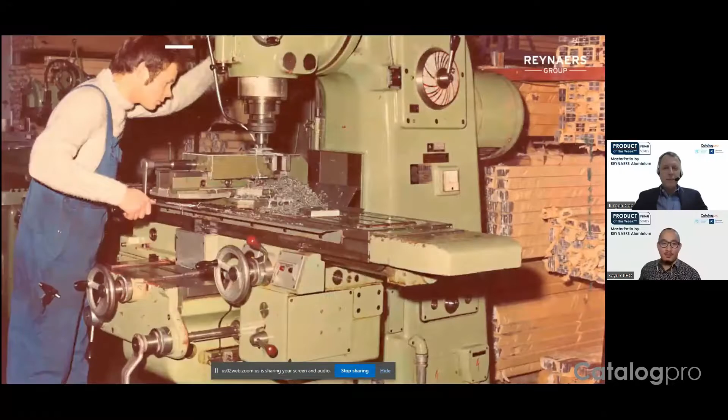Yeah, so hello Ledy, hello Sandhy. Yeah, so it's I heard it was a dialogue and not a monologue. So please, okay, I'll start with introducing the company.

It's a family business. It started in 1965 with Mr. Jan Reynaers, who was a fabricator. He started to make his own windows and doors and designing his own systems. Then his friends said, look, I don't know how to extrude a profile, I don't know how to design, but I'm interested in making windows and doors. So at that time, Mr. Jan Reynaers started to sell the systems to some of his friends and other people. This is how we became a system company and not a fabricator.

A little bit about our values. We are entrepreneurs, we are innovative, so the word innovation will come back more times in the presentation. We act responsible as a large company. You have to take care of the environment and future generations. We will talk about it more during the presentation again. We give the best of ourselves, we are passionate about what we are doing, and we behave and act as a family. We are united together with all our partners.

A small message about partners. So also present in this talk show is Sugiarto from PT Aneka, which is our local partner in Indonesia. Later in the presentation it will be more clear how that relationship works, what is Reynaers and what is the local partner, in this case, PT Aneka.

Our mission, so Reynaers already have a representation in Indonesia, right? Yes, correct. Yes, he's here. The name is PT Aneka. Oh, okay, PT Aneka. Yeah. So for the architects from Indonesia, if they want to spec in the Reynaers, they can just call PT Aneka, right? Yeah, easy, also anytime.

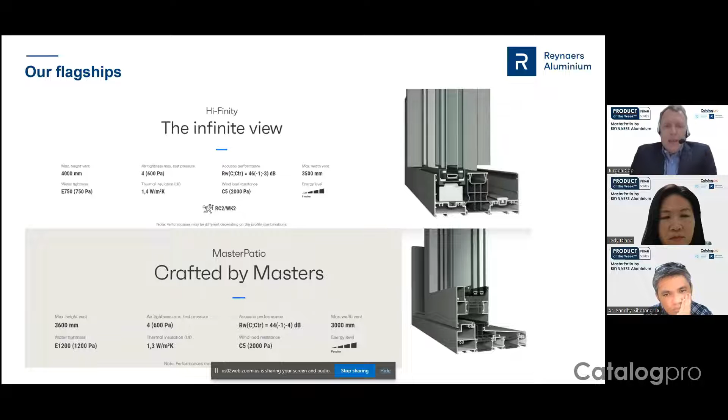Yeah, so our flagships, the first one is Hi-Finity. The Hi-Finity was a huge success, people loved it. There was also a little bit of a downside, it was a little bit expensive compared to a normal product. And then we made something else, something competitive, which is the MasterPatio. So Hi-Finity, you see it on the screen here, the infinite view. I'm going to start with Hi-Finity. So this is the type of projects that you can do. You can also repeat this on different floors in high-rise projects. So it's not just a sliding system, it's a facade system with a sliding window inside and with minimalistic look, minimalistic sidelines. You can also call it razor edge picture frame, however you want to call it. So this is what you can do with Hi-Finity.

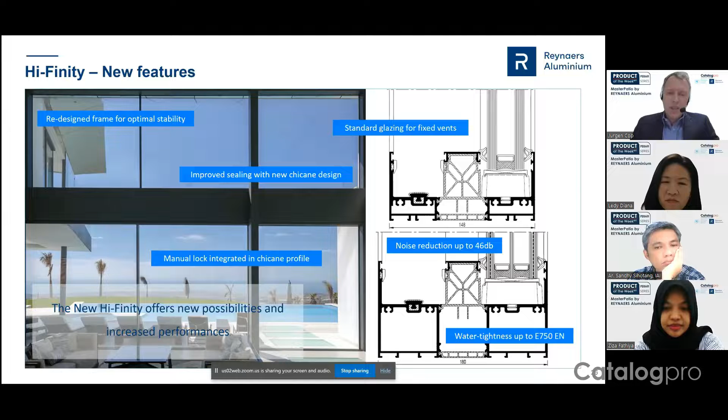That's the minimalistic look. But how do you lock your door? We did that at the top of the door with a pin that drops down, using electricity. But we had so many questions asking for a manual lock that we now made one, located on the chicane profile here in the middle. Noise reduction up to 46 decibels.

Water tightness - this is a normal sliding door, the Hi-Finity, not a lift and slide, up to 750 Pascal for water performance. When you see in my presentation, or later on the website or in any product documentation of Reynaers, a water tightness or wind performance figure, you have to imagine this is the standard tested value.

Why don't we put the maximum there? Because if it's, for example, 1,500 Pascal, which we also did before with certain products, that means we probably did something special to the window or door, maybe related to a certain project or certain circumstances. But the 750 Pascal you officially see in the documentation will always work if you use the section related to it.

It doesn't mean we cannot do higher - it means this is what will always work. Otherwise, people will take that section and say, hey, you said it was 1,500 Pascal, I'm using it now, why is it not passing 1,500 Pascal?

Second of all, if we designed every window and door to handle 1,500 Pascal or whatever, it would need such a strong design and so many components that it would make the price too expensive for 80% of your projects, because not every project needs these extreme wind and water performances. So please don't only stick to what you see in official documentation - contact us if you have a different request.

We have a question because it's quite interesting to see a very slim and big sliding door, but for the handle part, the frame is kind of thicker than the other part. How does the locking system work? There's no normal sliding door where you just turn it to lock it.

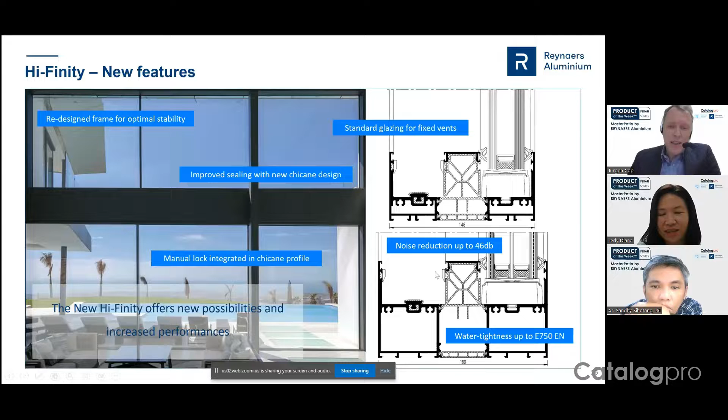Don't forget that this is a normal sliding system, not a lift and sliding system. So all you have is brushes here, and still you get this kind of performance. So this is normal sliding, yes. You're relying on the water to go into the grooves of this floor to be drained out.

I think the architect will be very happy with this detail. Later there's going to be another slide showing this more clearly. Okay, I'm going to go to the next one.

Another thing: now we have the bottom clean and the top clean, and we don't want to see the vent anymore when we open the door. So we call it a pocket solution — basically the whole door disappears inside the wall. You need to make sure, like in our project in Jakarta, that you foresee at the left side another wall where you can hide your vent. So during construction you have to make sure that wall is there. But these are details we can share once we go for that solution.

Corners: we have internal corners and we have internal and external corners. A lot of people like to open their window like this, and this is possible with Hi-Finity. To reduce the total cost of the system, if your Hi-Finity or your glass is continuing, it can connect on the right side into a continuous fixed glazing profile, which looks like a stick curtain wall system, so the glass can just continue and the look will be the same. The capping on the front is 50mm, same as the chicane of the Hi-Finity door.

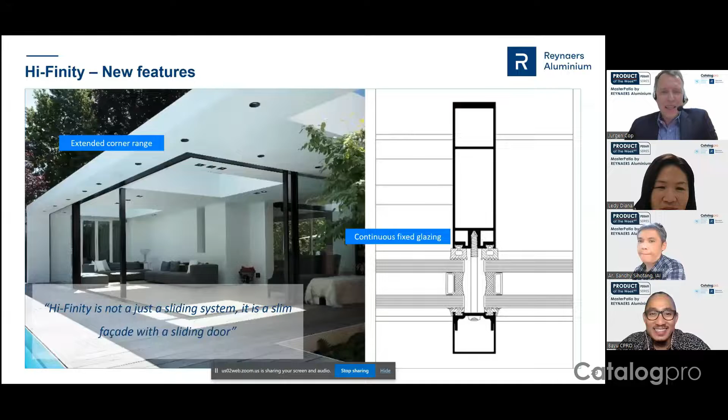Can we integrate this with your other products, Jurgen? Because many architects actually request this. Not yet — Hi-Finity is the highest level of the products we have, that's why we started with Hi-Finity. What we have in the other products at the moment is that we retrofit, or we make a frame and a vent on top of the sliding door.

So you can do it on the outside or on the inside. In Europe, we do it on the outside. In Thailand here, a lot of people like their mosquito screens on the inside. So we have a whole door, which is a very small profile, a rail and a vent, which we put on the outside of the frame.

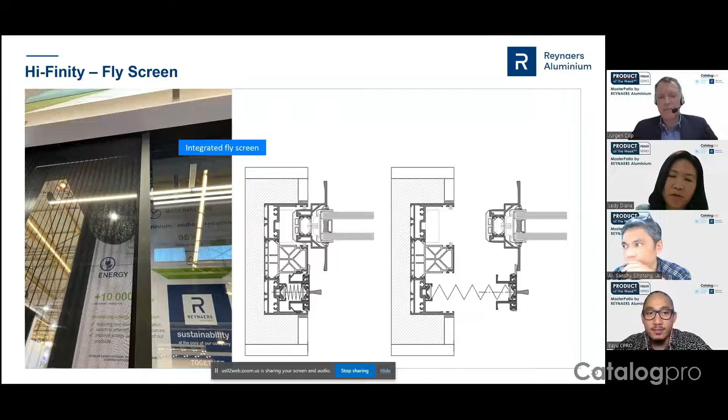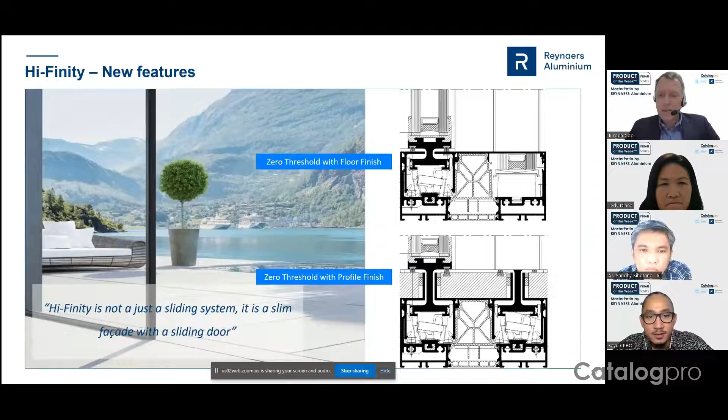I don't know if I have a section of the rail now. Here at the top, yeah, here the rail is. Do you see my mouse moving? Okay, so this is the rail. You can see this is not a small rail like you see in the MasterPatio - this is the normal rail that you know in a sliding door, right? In Hi-Finity, it is like this.

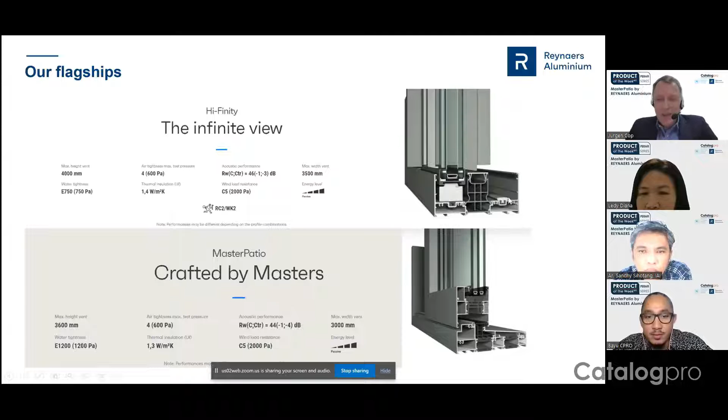So, if you look at the wheels, they are not straight - they are a little bit bent to the inside. This is to prevent it from coming off the track, and it gives extra strength and extra smoothness when you roll the door. So we did a lot of tests on the shape of the track and the wheels, to find what would be the best way to slide it smoothly.

For example, we make these bearings in stainless steel. Why stainless steel? Because it has very high durability - we do tests on durability - and it has a very smooth movement. What do some of the cheaper competitors do? They make it in the standard material available from suppliers, which is copper. When the rollers are made from copper, they are 25% cheaper, but copper is softer, so it's not as smooth, plus the durability is not as big - it wears out more quickly.

Also, these rollers are very difficult to clean. And when you get corrosion - if you are in an aggressive environment and cannot do cleaning, like a window outside where it rains every day and rinses the salt off, you will never get corrosion there, but the wheels you cannot clean. So it's important that they are in a higher anti-corrosion class, and C5 is the highest class you can get. This is the standard item from Reynaers - if you buy it, it's C5 when it comes to corrosion.

So this is something that is coming more and more. Again, I repeat myself, the environment is getting more and more aggressive, and we are getting ready for this. So we thought about having in the range a non-anti-corrosion and an anti-corrosion version, but then you reduce the volume and the price becomes much higher. By doing everything in anti-corrosion when it is available, you create volume and the price difference becomes very small compared to your whole aluminium system.

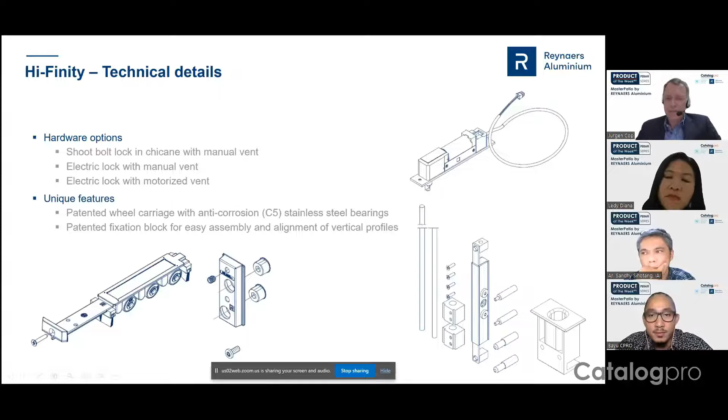This is a little bit of a summary of the things mentioned before. On the right side here, this is a glass-to-glass corner. So if you don't want the corner to open, or if you don't have budget for it, if you want value engineering, cheaper, but you don't want profiles there, you want it almost open, you can make a glass-to-glass corner in Hi-Finity. You just connect the glasses, glue them together, install it into a Hi-Finity, so this is fixed, and then you have a fixed corner.

Apart from what we saw before, where you have the opening corner—this would also be fixed, and this one is the movable vent. So this one you can open and close.

What's the handle, Jurgen, for your slider in that section? Yeah, the handle is here. Okay, yeah, that's the handle. It's not invisible, but it's almost invisible.

If we have time, I can exit this presentation and go to another presentation to show you the actual handle. It is very streamlined—not completely invisible, but almost invisible. So if you have a manual door, you need that handle. Theoretically, if you have a motorized door, you can leave away the handle, so you see nothing. The lock is invisible, no more handle. If you have a manual door, you still need a handle to open and close your door.

So basically, with the automatic version, I only see a single frame on the left side. That frame, that window—you don't see that frame. It will be hidden behind the wall, built inside the wall with plaster boards. You only see in the middle here, this section of 50mm—that's what you will see.

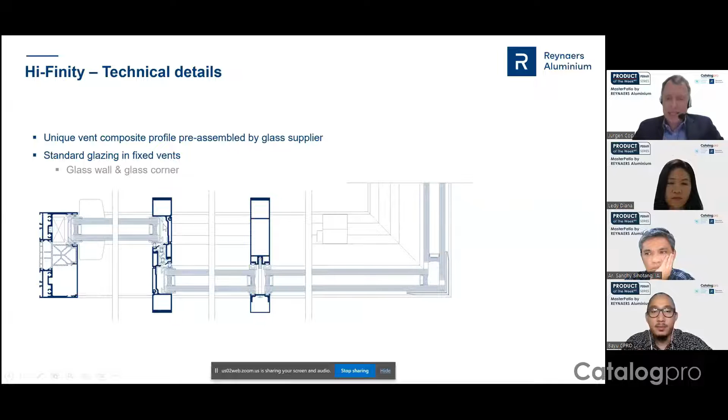So, new design, MasterPatio. What is MasterPatio? Basically, it is the next generation lift and sliding system. Why next generation? Because we took all the sliding doors from Reynaers, we took all the sliding doors from the competitors, we took all the best features, and put it into this sliding door. And at this moment, all the features of MasterPatio combined cannot be found with any of the competitors in the market.

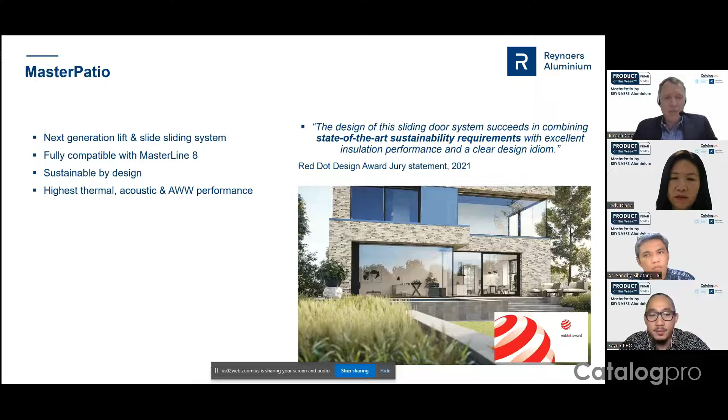So it is the design of a sliding door system. The design succeeds in combining state-of-the-art sustainable requirements with excellent insulation performance and a clear design idiom. We already won an award last year with the system. You can see the picture how it looks, and now we go a little more into the features: water tightness up to standard, up to 1200 Pascal. Hi-Finity's normal sliding door is 750 Pascal—this one is 1200. You can see, right, with a slim chicane.

So here, that profile is also very slim, 50 millimeters only.

I'll talk about performance first. Wind resistance, class C5. Sound reduction up to 44 decibels.

Why is it less than Hi-Finity? Because sound reduction is a lot affected by the glass. Hi-Finity is practically only glass, so you have very high acoustic performance. Here you still see profiles, at the bottom, so the sound reduction is a little bit less. For me, because of the proportions, since these are huge doors, these black lines are often still acceptable, while with Hi-Finity people don't want to see them. In MasterPatio they are usually acceptable.

Operating forces, very important, class 1, the best class you can get. Operating force is the force needed to open and close your door. These doors are usually huge, with glass up to 63 millimeters, double glass, triple glass, laminated glass, huge weight. So it's important that it's easy to move that glass.

The first MasterPatio, and the new one coming in April 2023, will have a 30% reduction again in the operating force of this door. This comes from keep on finding new designs, new ways of doing things. A few of these I will mention later in the presentation. This is what these 100 engineers are doing.

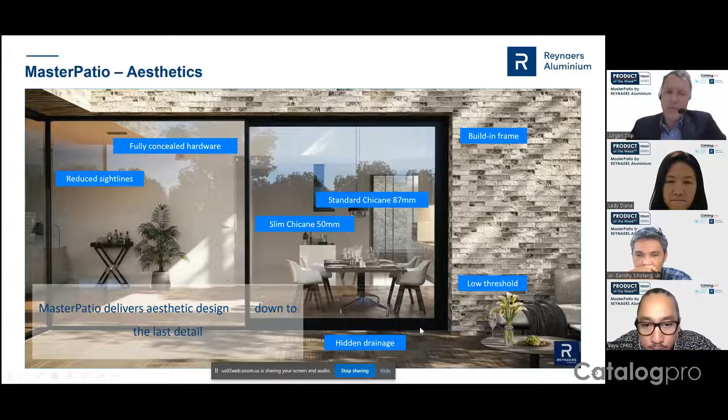Again, low threshold, built-in frame is possible. At the bottom here we see a hidden drainage, the same principle Mr. Sandhy was asking about, hidden drainage under the floor. In MasterPatio we have another hidden drainage, which I will show in one of the next slides.

Innovation: symmetrical design for easy fabrication. It's easy to design a fantastic product, but if you need an astronaut to put it together, that's not possible. The product is assembled in factories all over the world, so we make sure that when you do the assembly, you cannot make mistakes. It can't be 100%, but we do as much as possible. By using a symmetrical design for certain parts, if they put it left or right, it will be the same and correct, that's what we're trying to do.

Low friction sliding gasket. Normally, if you take a gasket from any other system and put two pieces of aluminum together and slide, it will get stuck. Especially with a very big sliding door, you have a lot of surface where the gasket and the sliding aluminum are touching.

So the friction will be so hard that it's impossible to slide your door. Why do we still want to use gaskets? Because if you use a brush, which is normal for a standard sliding door, the wind and water easily get through. You will never get extreme high performance. That's why by using gaskets, you get much better wind and water performance.

Special glass supports, yeah, all patented. Why do we use special glass supports? Because it is very important that the glass weight goes straight onto the wheels, straight to the track, and straight to the floor. In a lot of systems, when you look at sliding doors, you see that they make the glass asymmetrical with the wheels, meaning that in the continuous life cycle of that sliding door, the wheels are always being forced, there's always stress on them. So this is extremely important for getting a better performance, for example 30% less friction or operating force.

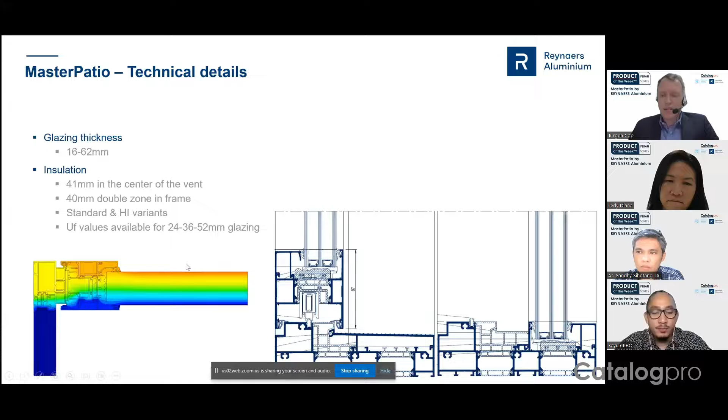Hardware options: we have the standard and the comfort locks, and we also have very high locks. If you have high doors, you also must have the hardware to support this.

The receiver is now concealed in the frame. You see this one here - this is the receiver for the lift and sliding doors. Usually the locking point is popping out or sticking out, but here it's hidden inside the vent.

We have a lot of different options - six different options for handles. Touch, Horizon - these are Reynaers names. This refers to the handle here, and this refers to the look of the handle.

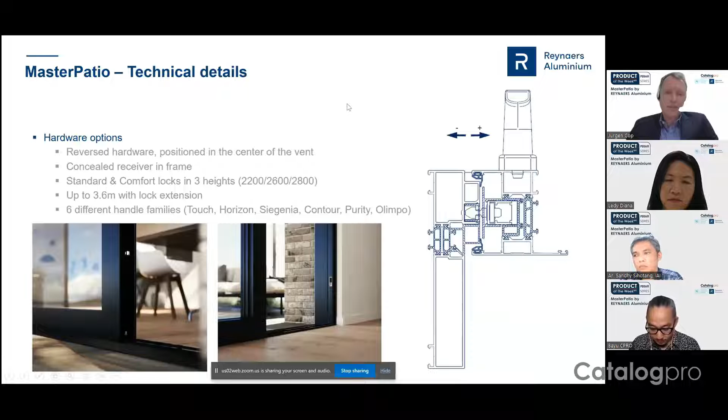Not to go too much into detail, but I do want to show this one: soft stop and soft close. That means it's the same as you probably noticed from a kitchen drawer - when you close the drawer, the last millimeters it stops and goes very slow.

You have to imagine you now have a very high door, 3.6 meters. If you look up at the room where you are, probably that's not even 3.6 meters - it's probably less. So when you close the door, it would bang the outer frame and you could damage your door, because the doors are now so easy to open and close. We made them so smooth that it becomes even dangerous.

So you can have a soft stop and close, so that when the door reaches the vent, it will stop first and then slowly go into the closing position.

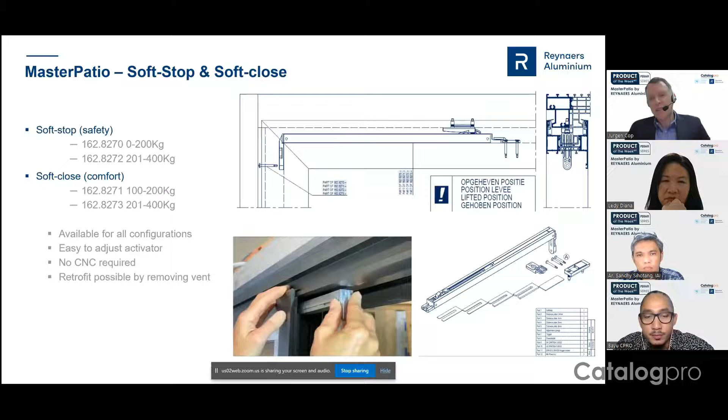Water drainage - a question from before, but here I have a very nice slide to show how it works. On the inside, for example, you can have an additional profile. You don't have to, but if you want, you can have an additional profile to finish your floor on the inside. This is the inside.

Why do I know this is the inside? Because I see the glazing bit here. In a European system - not all of them do it, but in a good European system - the glazing bead should be on the inside. First of all, much better for water performance. Second of all, burglar protection - if your burglar knows how to work with an aluminum system, they could clip out the glazing bead, take out the glass, and go inside. So that's why in the European system, normally the glazing bead is on the inside.

Here, this is the lift and sliding system. So here you see a gasket. What happens if you operate the handle? The vent will lift up, the gasket no longer touches, nothing is touching, and you slide it - lift and slide. When you close your door, it drops down and these gaskets touch here. That means you now have a very good wind and water performance, because it's no longer a normal brush like in a sliding system - it's now really closed with the gasket, like in a normal window.

Water comes from the outside, goes down, and then we drain it to here - down into a gutter. I mentioned this before - we could also drain it here, under the floor, or we can drain it to a gutter. It goes to the left and right side to a pipe, and then it goes out.

Here we can do it with the floor, or we can have an aluminium cap here - depends on what is preferred. Some people prefer to see all the aluminium here, some people prefer to continue their floor. There might be a reason why you cannot continue the floor - if the floor is too thin it will break, or whatever reason - so then you have to do it with aluminium.

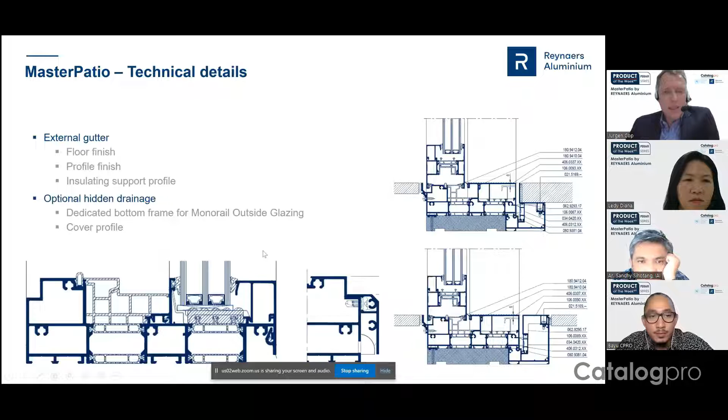Sometimes you have huge glass panels, basically theoretically there's no limit. The sliding vent, because it has to move left and right, has a weight limit. But the fixed panels, people want bigger and bigger panels, and sometimes it's not possible to bring the glass to the inside. Sometimes the doors on the inside are too small to fit.

Don't forget, you can say, yeah, but the roof is not on yet, we bring the glass through the roof. Very good, but what if one day that glass breaks? We always think about what happens in the worst case situation during the usage of that system. If the glass breaks, you are stuck, you cannot replace your glass. So if it is a huge glass, it has to come from the outside.

It is possible that you have a high-rise tower, and that these are balconies, so there will be no burglars on the outside that can come and take away that glazing bead. And anyway, if they take away this glazing bead and the glass is 500-600 kilograms, good luck to the burglar. So that's why this is an exception, why we accept the glazing bead on the outside for a monorail.

What is a monorail? A monorail is a system where when you have a sliding door, you have one sliding vent and one fixed part. This is sliding and this is fixed. In a traditional system, they would make two vents, wasting all that money on material and fabrication. They would make a real vent and fix it.

We say, no, why you want to do that? We can save cost here. We don't have to make this vent anymore, we put the glass straight in the outer frame. So if we would be competing here with a local system, we would come very close with our price, if you don't have that monorail.

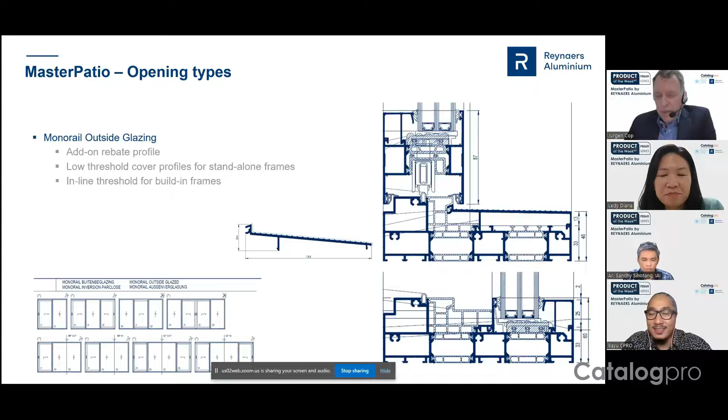So here you see the movable parts on the inside, and here on the outside. As a standard, we put the sliding part on the inside because it's more away from the rain and weather, and it's better for water performance. If you want it on the outside, we have to check which system it is, and it might give slightly less performance.

But we have a lot of projects where they want it on the outside, and we put it on the outside. As a standard though, it's on the inside. It's possible, but we have to advise you on the potential reduction of performance.

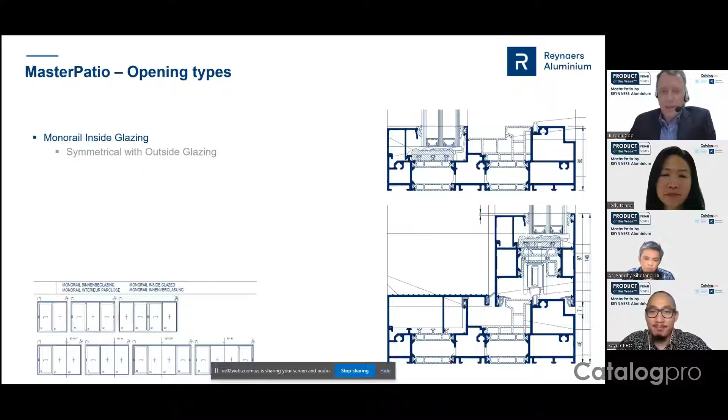Look at this profile. You see here, this side and this side is exactly the same, so this vent, if you put it here or here, is possible, both the same. Now, multiple opening types, three rail up to six vents. Six vents, this is a huge door, a huge profile.

So now I will ask Sugiarto: here is the outside, here is the inside. How are you going to drain this profile? How are you going to make water drainage into a profile like this? This will take a lot of time, people start welding drills together, people start to do all kinds of crazy things. This is why in Reynaers we are now pre-punching these profiles, so when they go to the fabricator, they already have the water drainage holes inside.

As I mentioned in the beginning, faster fabrication - this saves a lot of time. It's already automated in the factory from Reynaers. Secondly, when we do the fabrication, we don't have to worry whether the worker did the water drainage holes or forgot about it. In Reynaers, they cannot forget about it anymore because we already did it for them. This is a very big advantage.

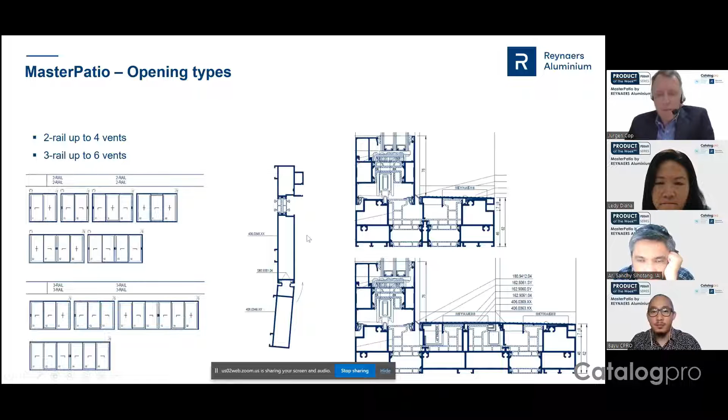And to make the profiles easy to handle, if you have a lot of profiles or vents behind each other, we have these clip-on profiles for the side parts to allow easy and fast installation. A middle closure - some architects want left and right fixed, and in the middle they want the part to slide. This is more complicated than you think, because normally we have interlocking systems where the vents hook behind each other to get good wind and water performance. So a situation like this is not as easy as you might think, but we designed a standard solution for this.

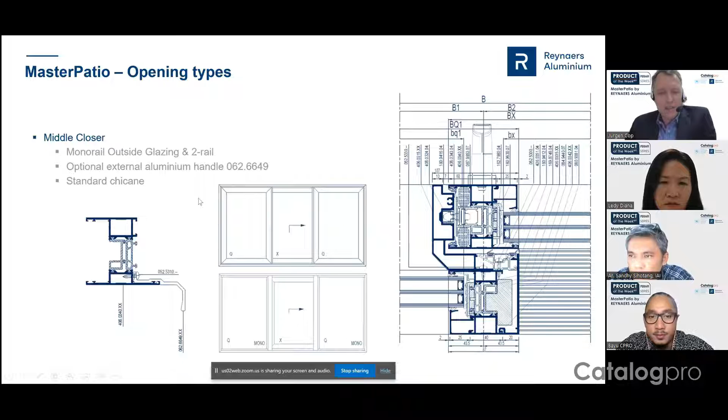Combinations - opening types and combinations. We can have a glass corner on the right side, a fixed glass, same as in the Hi-Finity with the glass corner. You can also combine the MasterPatio with a Masterline 8. Masterline 8 is one of our top windows and doors casement systems, as I mentioned briefly before.

Why is it important to use a standard Reynaers connection? Because the installation here is in the same line - the connection is made with a special profile to make this connection. So the systems in Reynaers are interconnectable. When you use a different type of system or element, from sliding to curtain wall to casement, we have a standard solution for this.

And this is what architects now love so much - a balustrade integrated into the sliding system. More and more people are trying to use the space as much as possible. I don't know about Indonesia, but in a lot of countries you pay for the square meters of the apartment including the balcony. The weather is so hot that a lot of times we cannot really use that balcony, so now we have a big sliding door which we can open to make the feel of a balcony. But of course, if you have small kids and it's a floor-to-floor solution, you don't want that. So now we create a balcony integrated inside the sliding door.

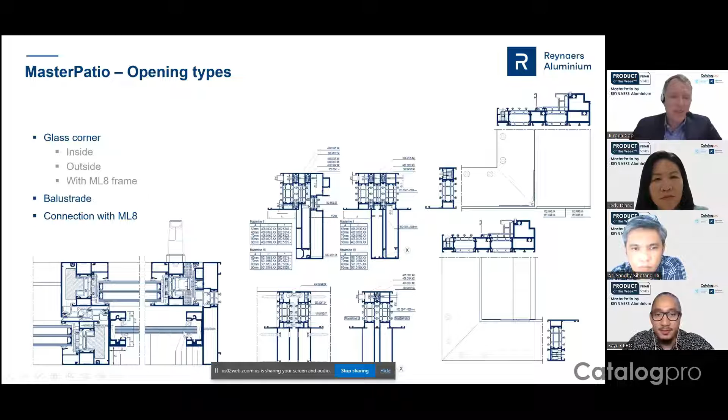Okay, summary. We have solutions for aesthetics. I will share this presentation so everyone can see it. To save time, I'll go to the main points but not repeat everything. So, aesthetics - we have solutions for aesthetics.

Performance, we have top performance, up to 1,500 Pascal for water drainage. Sustainable design - circular product, everything can be recycled, and we have connectivity with other systems. Cradle to cradle is becoming more and more important, for sure for all of us in the future.

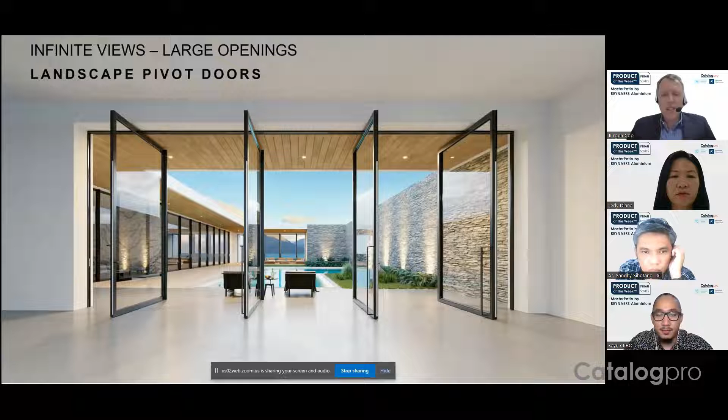A few other products which are very popular at the moment, in line with MasterPatio, which means large elements, large opening parts. So you see a visualization here - architects like to do oversized dimensions but still with slim sight lines.

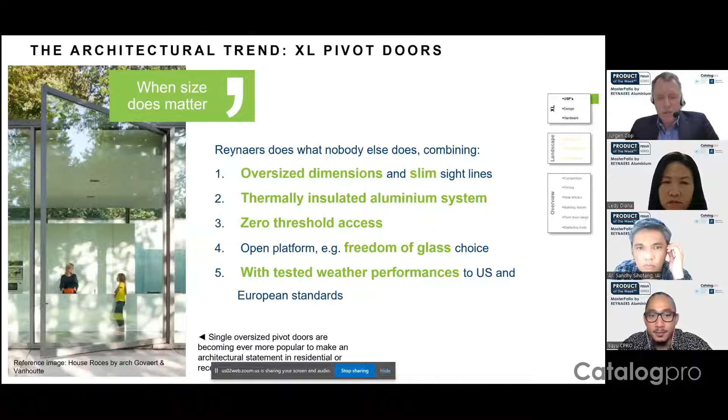Thermal insulation, if necessary. If you don't want the thermal insulation, we can take it out for big projects, for large volumes - open the die locally to reduce cost and lead times. Zero threshold access for wheelchairs, but also visual. Freedom of glass choice, and all tested according to US and European standards.

A few different solutions - residential, so not used that often. High-end domestic doors, even bigger. So we put different accessories, they need to be more durable. And landscape - a combination of doors for meeting rooms, restaurants, official buildings, etc.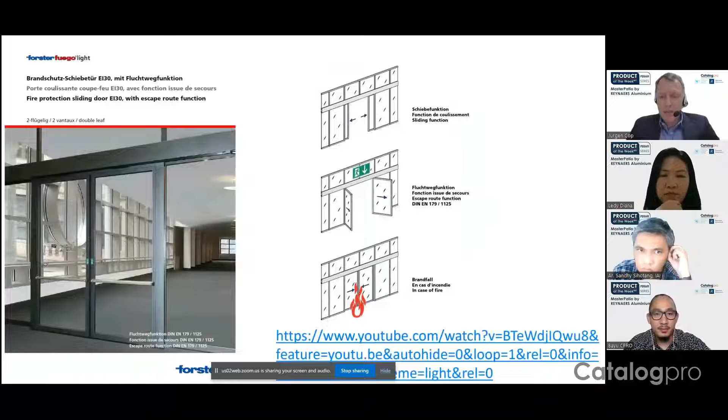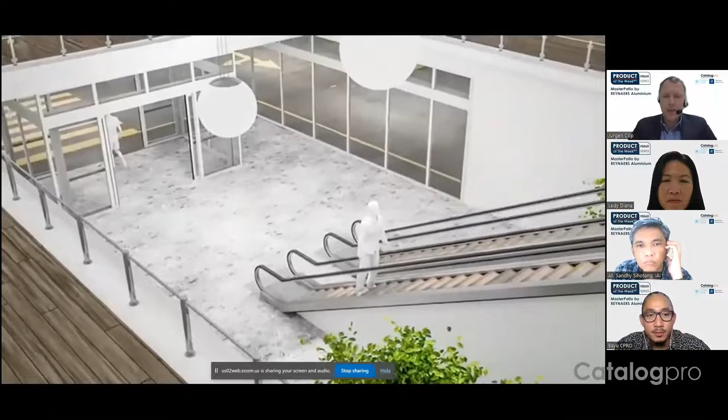So I will show one movie now. Basically, right now when architects want a fire resistant escape route, they need a sliding door, and next to the sliding door they have to make a normal door that has the fire escape function - you'll see it in the picture in a second. So now we designed both in one.

In a situation of emergency, people inside want to go outside. They push the door and it becomes a casement door - you see, in two ways, right? Tested up to 1 million cycles, which is enormous.

So here you see the old solution - it used to be two separate doors. And now it is integrated into just one door.

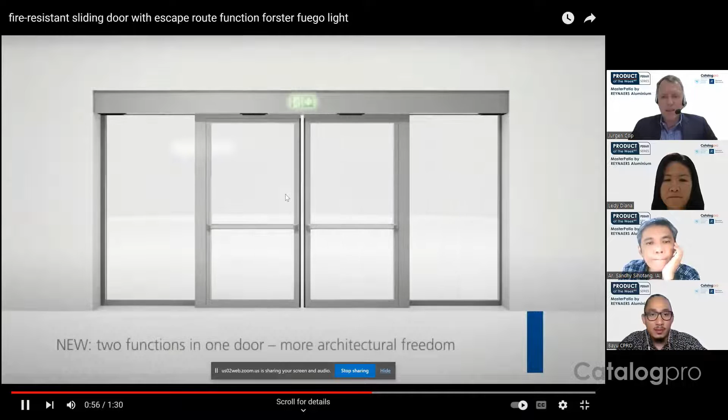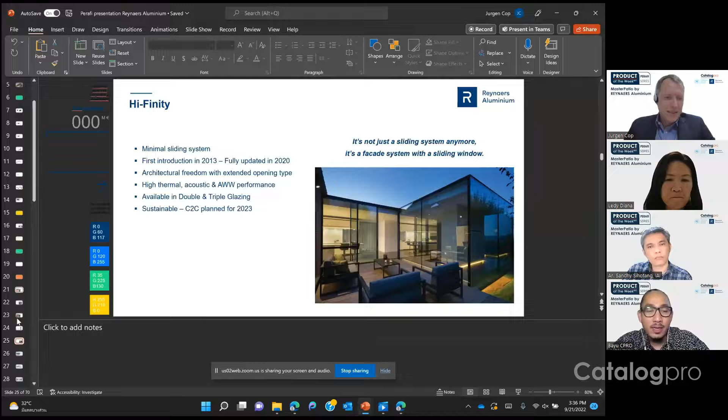So when asking about the maximum sizings, you already covered that in your previous presentation. This is Forster - I'm not going to go into too much detail about it. I just want to make sure you're aware that it's available also in our region here.